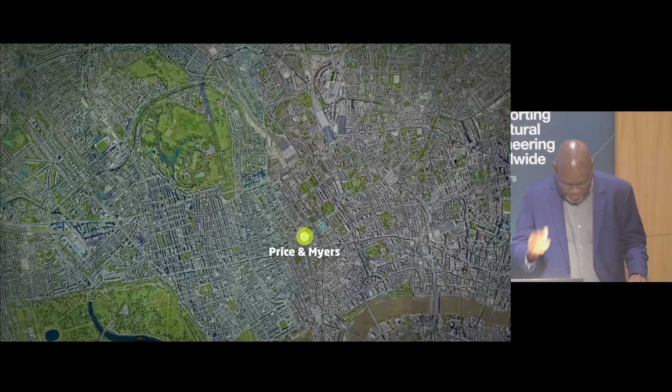Subsequently, I moved to London, working for Price & Myers for Sam Price, before joining the office of Anthony Hunt, a renowned gold medalist, whose mentorship was instrumental in my engineering development. Tony Hunt taught me the power of sketching in explaining the design process. Working with him was a privilege.

In 1995-96, along with Robin Adams and Hanif Kara, we established AKT.

As I mentioned earlier, I was deeply honored by the citation from the institution for this award, as I believe it recognized my approach to engineering and design.

Over the years, I've been involved in and I've led numerous remarkable projects. I feel an overwhelming sense of excitement and passion about being part of the process of constructing challenging and sustainable structures.

From the beginning of my engineering career, I have exceptionally been prolific in my involvement in structures, while nurturing and mentoring bright young engineers. I have surrounded myself with some of the brightest engineers, I believe, in the country.

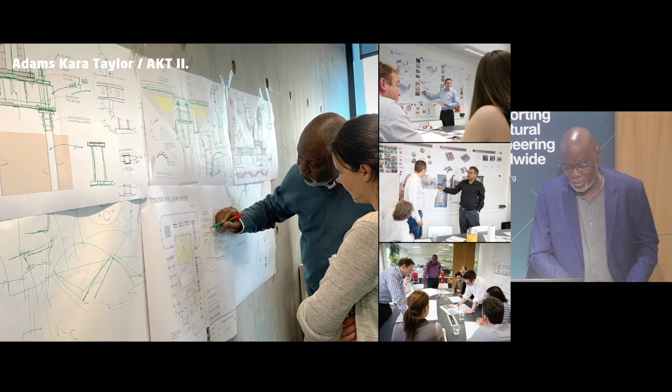The first project I'm going to present, in pseudo-chronological order, is the Royal Academy of Arts, Sackler Galleries at Piccadilly, when I was at Hunt's, working for Tony Hunt. It was an interesting project at the time with Foster and Partners, and it was to actually infill a gap between two historical buildings and provide a new gallery space to the roof.

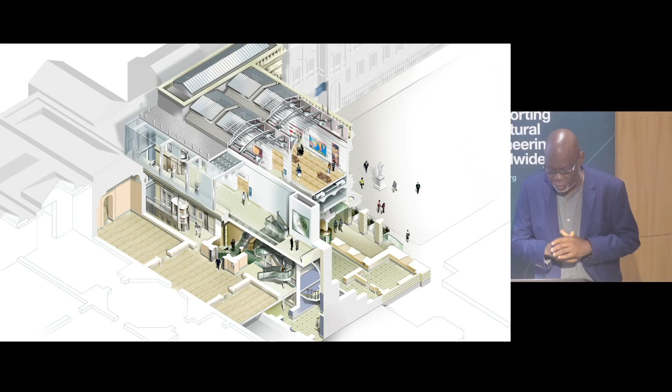The challenges to this project, and you've got to remember this was back in the late 80s, were two main issues. One was the fact that the norm of trying to create a half portal or a portal structure required eaves beams. But the architecture, Norman's architecture, was to try and bring as much light into the space from the rear of the building.

So his idea was to have glass that goes up and actually folds over the roof. So the challenge was to actually create a half portal without any eaves member. Back then there was a lot of negativity in doing it. But going back to the fundamentals of engineering, of what is the purpose of an eaves member, we were able to do it without having to provide any restraint.

Secondly, it was to introduce one of the first glass stairs in public space of this scale. Now, back then, there was hardly any glass stairs. So we had to design this glass stair without it being laminated, toughened, or heat soaked, by using pure, simple annealed glass. So you could see all the eyes raising.

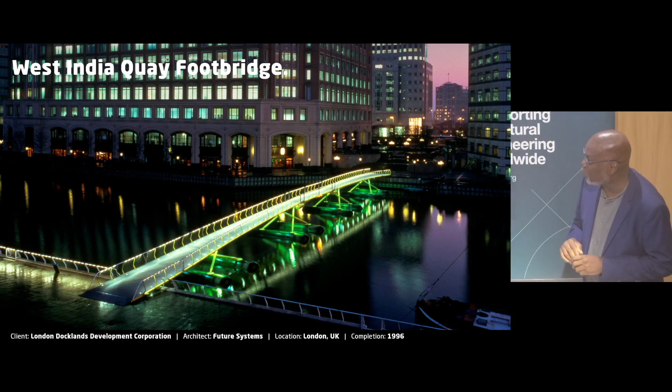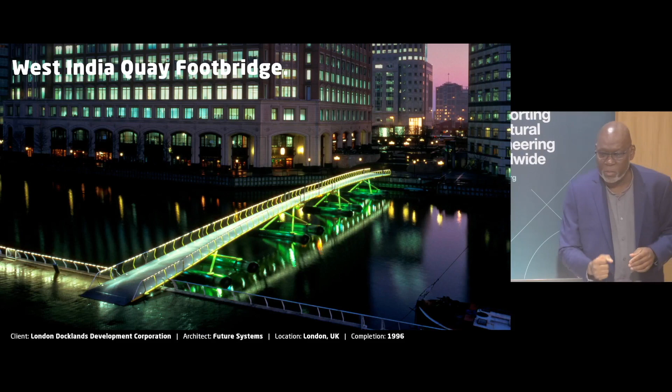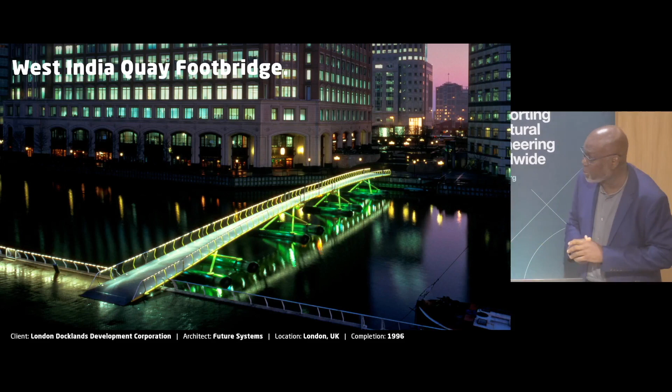Trying to go through the proof system back in 1994, 95 was proving very difficult. But we came up with the idea of having double pontoons, 10 meters long, 3 meters diameter, and doubling them with a cross member, and then using a cable to press them to the bed of the dock. By doing so, any tidal movement is eliminated. You only slightly feel the movement. And if any of you have been there, you'll see that's the way it works.

The next challenge was then, how do we deal with the opening mechanism? And we came up with this idea of actually counterweighting it through geometry to create a very elegant solution. And it was so well balanced that you can actually push the opening of the bridge with a finger. So we ended up with the tiniest hydraulic actuator, which was so small, we actually fitted it inside the tube, the spine tube that supports the bridge, to open and close the bridge.

And I must say, the guy who fabricated this was Bill Toston. And for me, he was one of the best fabricators on the planet. He was an artist with metal, and I'll talk a bit about him in the future.

I am trying to present projects that actually help to explain the way my mind thinks, the process I go through with engineering. This project, we actually had to go into the archives to try and find a picture of it. This is the Britannia oil rig, which is the last oil rig in the North Sea. And we were approached to do 4 staircases up to 8 levels to provide access up and down. And as you can see with oil rigs, it's all steelwork. And the issue here with so much steelwork: how do you maintain the protection on this steel in a very aggressive environment of the North Sea?

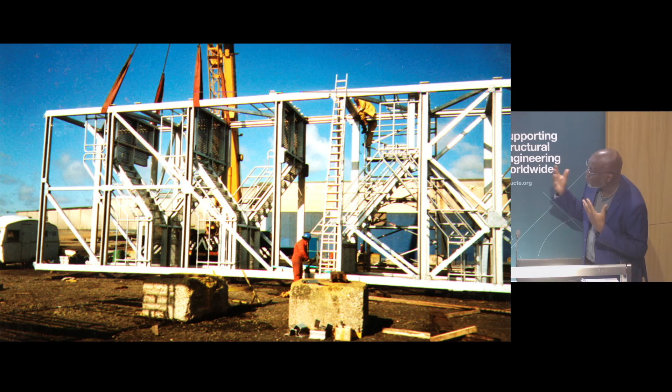And I said, this is who we are. We'd like to do some incredible aluminium structure. We'd really like you to give us some insight as to how we can weld this aluminium. And all I heard was clunk. That was the end of the conversation. But we did manage to do the project a lot lighter, actually quite stiff for what it's supposed to do.

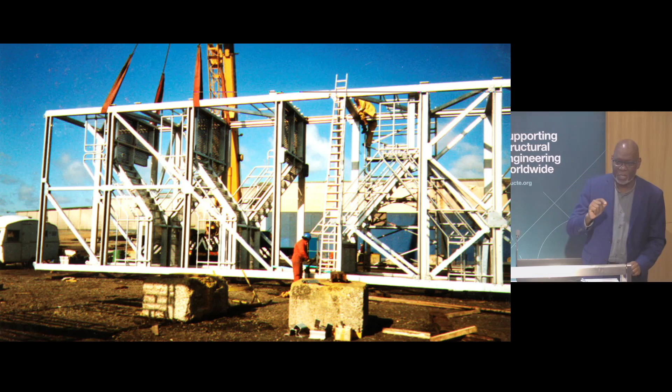Then the next challenge came on board, because if you're doing anything to do with the North Sea, you need to get approval by insurers, Lloyd's Register of Shipping. So they brought an army of engineers in to say, right, these are the procedures you've got to go through. We were a small practice at that time, and top of the procedure is that any structure you're doing in the North Sea needs to be analyzed using finite element analysis. Back then, it was 10 to 20,000 just for the license. And our most ambitious computer in the office then was the LC3 with 64K memory.

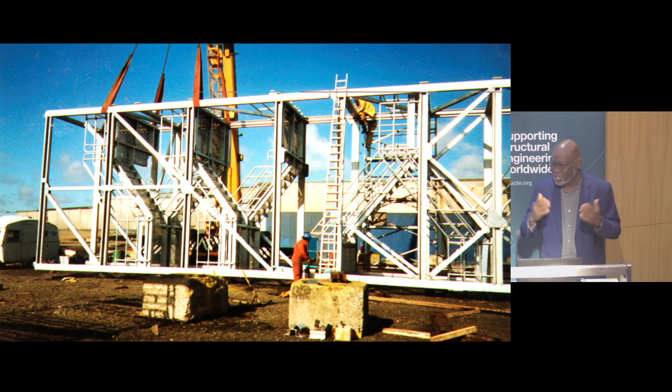And I can remember, right, where do we go from here? The solution wasn't the FE analysis. The solution was having a conversation with the engineers to discuss the fundamentals of analysis and structures. So, big meeting, sat there and I said, right, guys, there are three methods of analysis: stiffness analysis, which we had, finite difference, and then finite element. If you model your stiffness analysis carefully, the difference in result to FE analysis is about 5%.

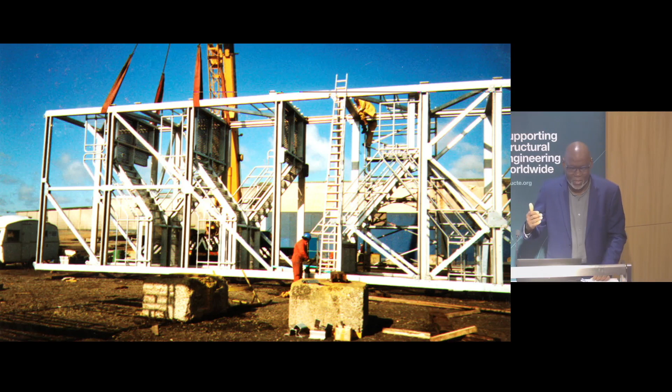And I went through all the theory with them, and they could not argue with the mathematics. And they then approved us to use a stiffness analysis to do this project. And I think it was the first. So we had to run it on a 64K Apple Mac that took 17 hours to run. But we got there.

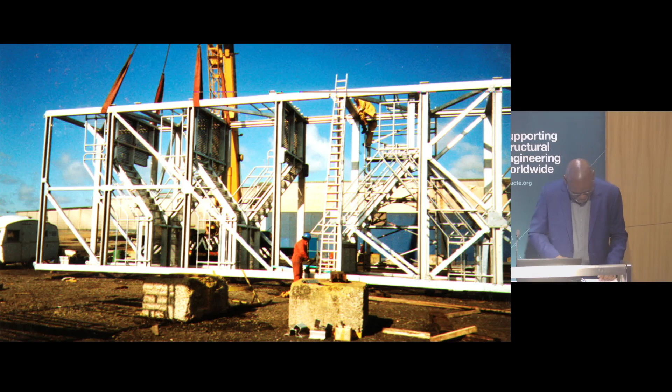Moving on, one of the other early projects we did was the rainforest in Hanover. And this building was the precursor to the Eden Project. Because when we left Anthony Hunt's office, the Eden Project was in the office, and it was a glass structure. Obviously, we did this competition with a very young architect then called Ray Hole, and this started back in 1997.

And there was this wonderful material called ETFE. It has a little bit of insulation because you're talking about pillows, and it actually allows UV rays through the material, which means it's actually good for plants, better than glass. But it wasn't codified back then. So we went through all the tests, German and everything. We then developed this scheme.

And one of the interesting issues we had was that the structure itself is not a pure dome. And because it's not a pure dome, we had two issues when we presented our engineering solution in Hanover, in Germany. This was just after the wall had just come down. One was the struggle to accept ETFE as a structural product. And secondly, the shape of the enclosure and the dome was outside the DIN standards. And that again was not acceptable.

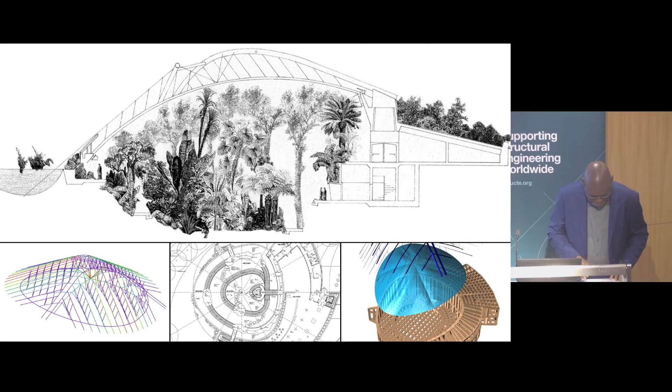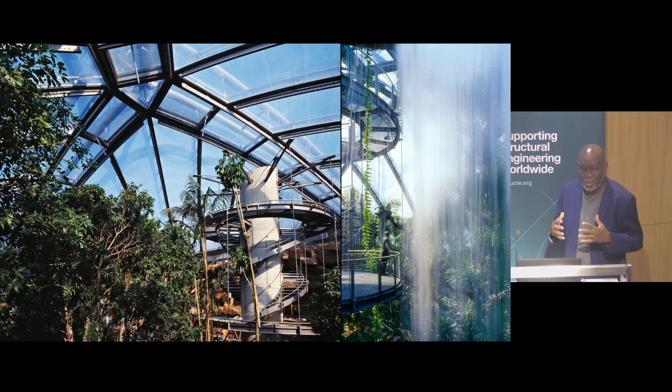And you can see, because it's got a little bit of insulation properties, they were able to create a super tropical environment in the space without having to lose so much heat. And we finished in 2000, and one of the South American countries used it as their exhibition space for the expo. Moving on, I'm not showing you fancy projects. I'm showing projects that have that essence of some of our thought process.

This is the LSE library in Aldwych, part of the LSE, and it was a project by Foster & Partners, and they were interviewing engineers, and we were not that big back then, and this was about 1998. We were put in as these young up-and-coming engineers, and we were there to only do the dome in the atrium for the glazing. And we were up against some of the usual suspects. And the director of estates for the LSE turned around and said, why are these guys put just to look at the dome? Just put them in with everybody else.

When we got the brief, this building used to be the headquarters for W.H. Smith. And the whole concrete building is fully carbonated. It is actually the building that was used to write the CIRIA guide for how to identify and deal with concrete cancer. Great. The scheme was to knock down the whole internal of the building and put in a new structure. And the first thing we said, we are not knocking it down. But they said it's carbonated. We said, so? If you actually understand the chemistry of concrete, carbonated concrete gains a tremendous amount of strength while corroding the reinforcement.

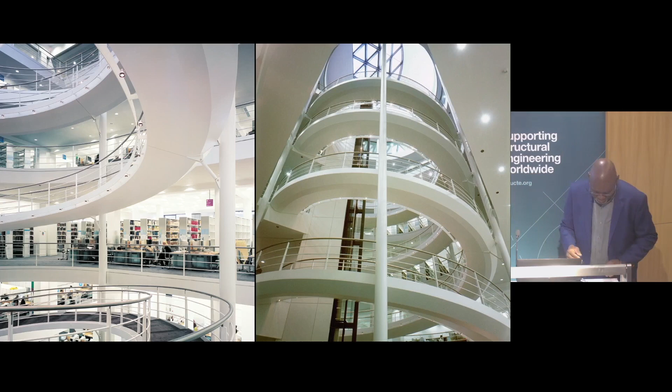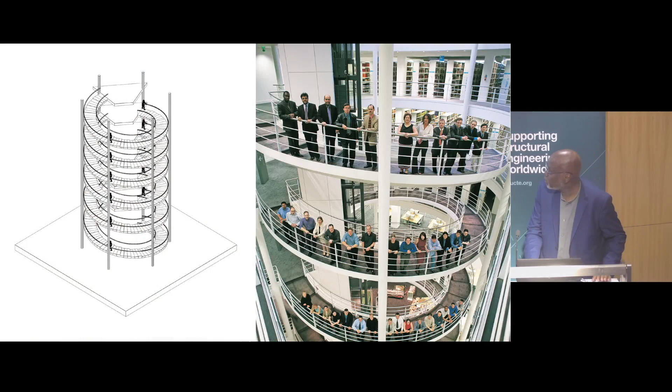The next project I'd like to show you is the East Beach Cafe. And this came about with Thomas Heatherwick, where he was working on it for a while, and he wanted to create this driftwood. And the client, who's probably here, decided to create something much more entertaining and iconic on Littlehampton Beach. So she bought this timber shed, got Thomas to come up with a design.

Thomas came up with a design with this shell with a lot of internal columns and everything, and it wasn't going very well. So the client then said, I like Albert's view on this. So we looked at this in the office, and you could see the passion of what the client was trying to do and what the architect was trying to do, and it was very aligned. That alignment means that what was being proposed needed a unique solution.

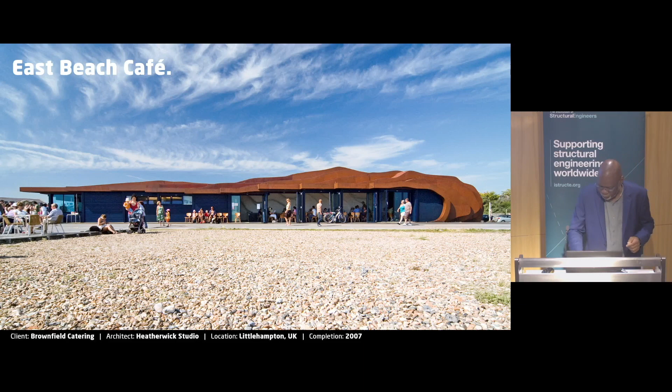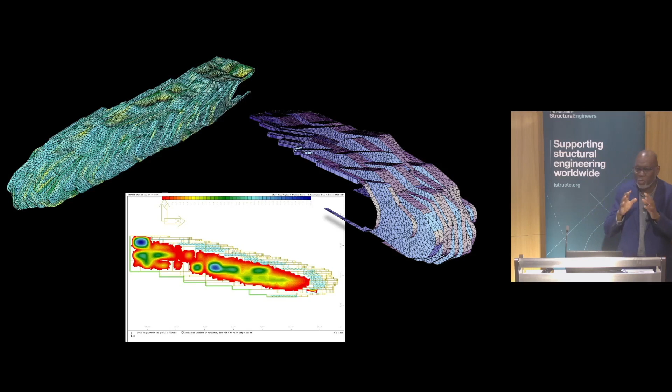And for us, it was first taking the architect's model and remodeling it. Not only did we remodel it to make sure all the curves and the dips were done in such a way that it will not capture any moisture, it will drain off. We took all the columns out and insisted we're going to try and get this to work as a shell without any internal supports. Then we also had to think about the environmental.

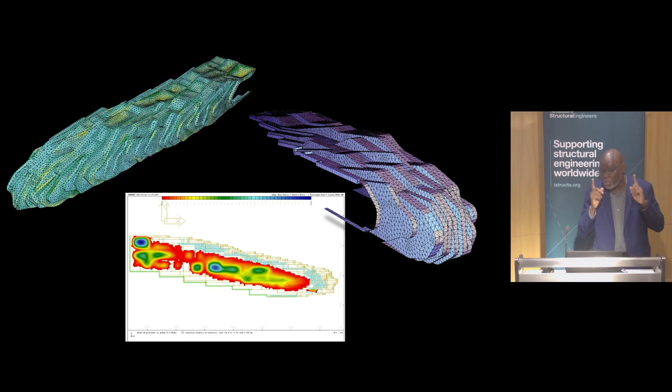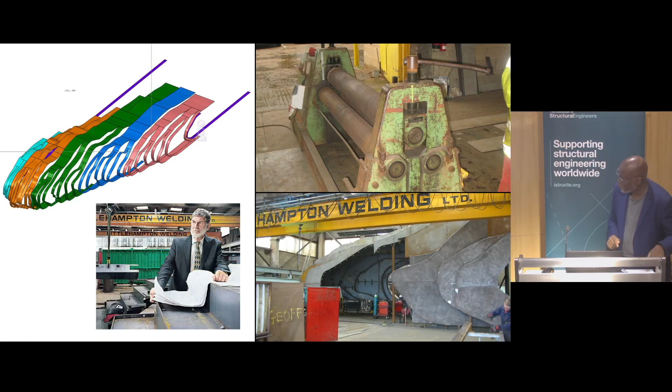So, the first person I contacted was Bill Tustin. As I said before, he passed away almost about 3 years ago. To me, he was an artist with metal. And he basically said, I have a 1950s roller somewhere in the shop, and if you can use that to do it, I'm on board. And you can only do 600 millimeters wide, and it's not more than, I can't remember, 6 millimeters thick.

So we redesigned everything to strips of 600 so that he can roll it, and the whole thing was rolled with that hand metal. And then the inside, we literally sprayed it with insulation, and painted it, that's it, to get the environmental in place. But we had a lot of fun getting it through.

The next project was again with Thomas. There was a competition for the expo in Shanghai. And I can remember we had a conversation, let's go for this. So we went for it, and we went through a lot of options. And we entered the competition, and Thomas was saying, I've got this idea. I'd like to do a box with about 20 or 30 spikes sticking out. And I said, 20 or 30? Why don't we try 100,000? He said, can we do that? I said, I wasn't sure whether we can, but I was quite prepared to give it a go.

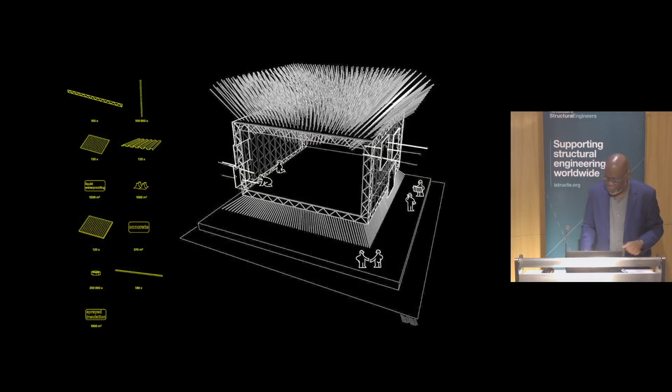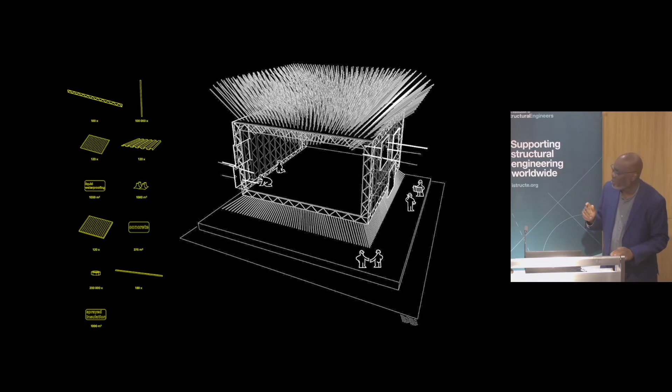And I remember this was the idea we presented: prefabricated timber box, drill. We never got to 100,000, by the way. There was just enough space for 100,000. We got to 60,000. To literally punch holes through this timber. And then Thomas came up with this amazing idea to actually use seeds from the seed bank. It was called the Seed Cathedral.

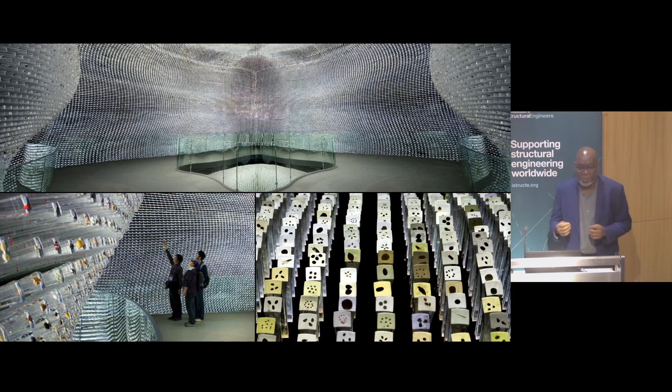And as you can see, the reverse of the shape externally formed an amazing space internally. And during the day, light penetrates into that space through every single acrylic rod. And in the night, the light goes in reverse.

Again, we had some challenges. And the challenges actually became a diplomatic problem, where the Chinese government at the time refused to sign off our design. And the British government was very clear that this piece of land for the expo is part of Great Britain, and we can do whatever we want. And then afterwards, we'll demolish it, and you can give it back to the Chinese. And the Chinese were saying acrylic and aluminium in our composition was not a structural material in China.

So Thomas and I had to take some very urgent flights to Shanghai to meet the ambassador's representative and a member of the Chinese government, and it became a loggerhead. This went on for a bit. Eventually, it was agreed that we get a professor from Tongji University to evaluate what we've done and approve it, which is exactly what we did. But even then, we had to compromise for political reasons.

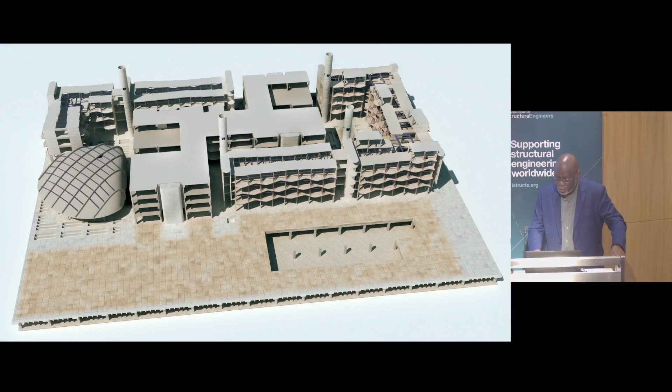The reason I've put this project in is for one reason and one reason only. From my experience, this project actually kicked off in real detail the whole conversation of zero carbon. Because when it was built, the client literally gave us a challenge. It was an incredible challenge to try and reduce the passive heat on the building. And we had 6 weeks.

We were called in and they said, we interviewed engineers from everywhere, what as engineers are you going to bring to the table to deal with sustainability and zero carbon? And we said, we only got one. And you got to remember, this is back in the early 90s. We said, in the Middle East back then, every time they were doing concrete of any scale, they had to use crushed ice in it to stop the cement hydration.

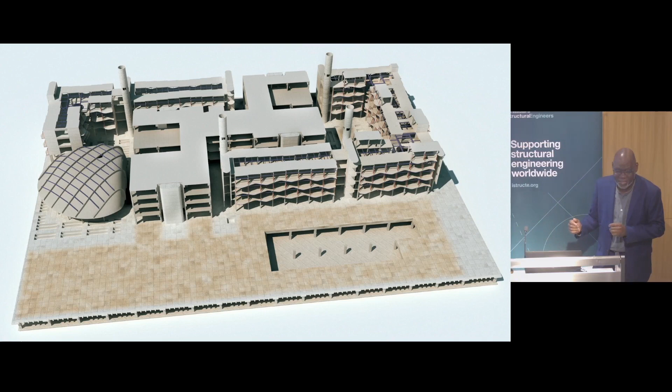We said, why don't we just take all the cement out and put a binder in and let the sun in the Middle East do what it does? And they said, is this possible? And we said, yes. So we took 80% of the cement out. They had to import the binders from India. And the client was so impressed and said, 6 weeks, we want foundations to start because we're going to bring the sheikh to see what we're doing. We're starting with a very sustainable approach.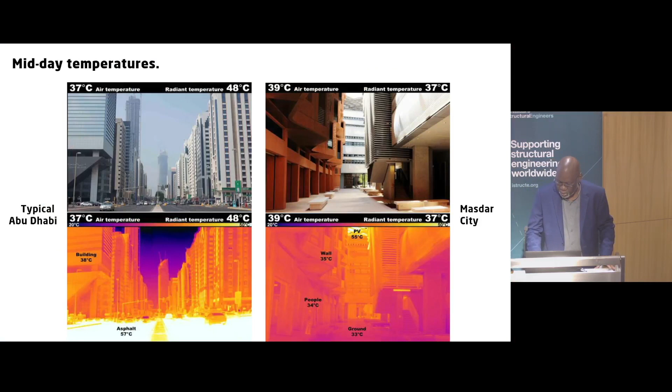And it got done. And some measurements were taken by Foster's afterwards, and you can see how the radiant temperature in Masdar is reduced compared to downtown Abu Dhabi on the hottest day. And this is relevant, very relevant, because we're using the thermal mass and the basement, or the podium we did, to cool.

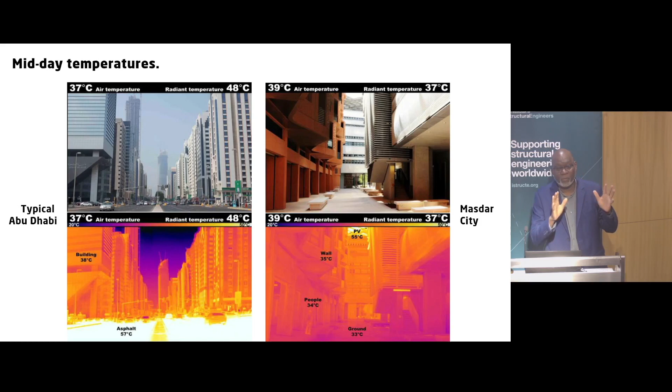And from my experience, this is one of the projects where you had some of the first electric cars self-driving using magnetics. So if you go down into the podium area, you just sit in the car, you type where you want to go, and it'll take you there. And I remember one of those cost, I think it was 1.3 million at the time. Anyway, they only did a handful and then they stopped. Technology moved on.

The next project I'm going to show is a fascinating one, this is the tallest building in Accra. And the reason I've put it on was, again, to try and explain how our office thinks. We got a call from the architect saying, "I've got this client. He's not crazy, but he wants to build the tallest tower in Accra, 25 floors plus." And he said, "Would you like to be involved?" I said, "Of course." So he came over, we had a meeting. He says, "I'd like you guys to get involved in the early days and move forward." I said, "Fine, that's fine."

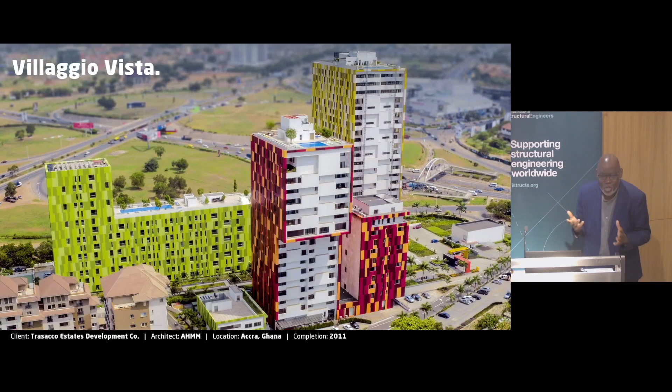And I said to him, "You want to do 25 stories plus here? Have you got any piling rigs in Accra?" "Yeah, we've got 3." "Right, I need a piling rig that can do 750 to a meter diameter as a minimum." He said, "I'm afraid the ones we've got can only do 450." I said, "Well, okay." Then he turned around to me and said, "Albert, do you think you can put me in the direction where I can buy a piling rig?" And I said to him, "No, you're not going to buy a piling rig for one project. Leave it with us." The solution was not to put a piling at all.

So the first thing we said to him is, your single basement is going to be a double basement. Put all your plant in there, great height, and we're going to create a caisson in concrete. And you're not going to pile this building, even though we're in a massive seismic zone, which is exactly what we did.

But I'm also very proud of this project because every material was done locally. Even the block work: we used a local block work of unknown strength, tested it, to form the external cladding to the building. And it's still there today, and it's still the tallest building.

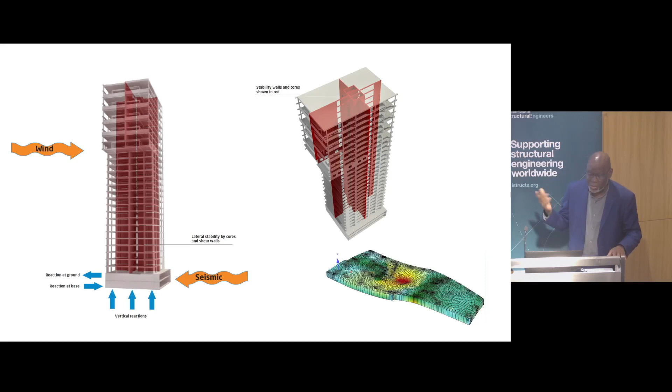And one of the most beautiful things was that they didn't have tables, so it's not a flat slab. We actually went back to the old beam and column process where we put all the beams on the perimeter. And every single column is one width, 200, to match the local block work. And then the length depends on where it is. And all the floors were done without any table form, because they didn't have any table form.

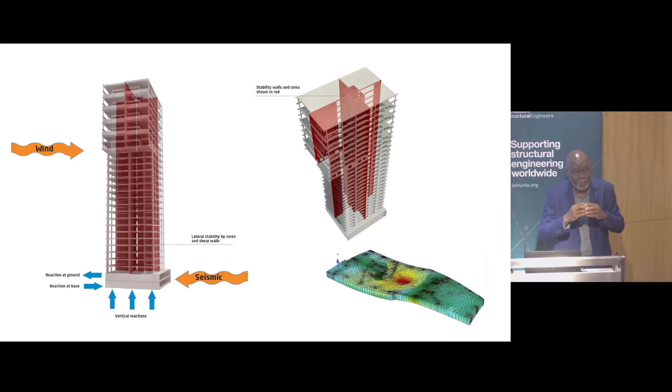So we went to the local concrete factory that produced 100 by 100 profiled lintels for doors, and we got them to extrude them 3 meters. And they literally laid them, no craneage, laid them next to each other, clear sellotape in between, put all the bars, run into the beams, topping concrete, and that's what made all the floors with a single line of support. And that's working with the local.

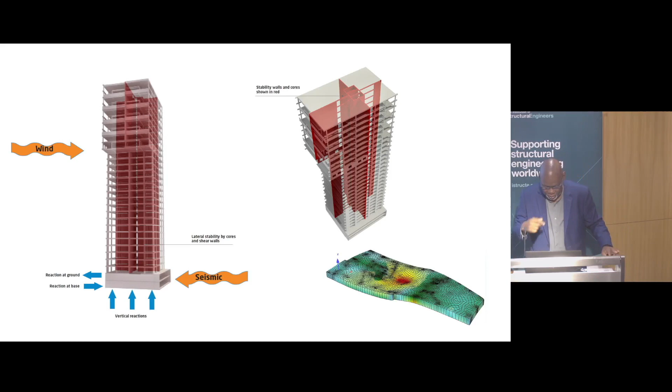This project with Zaha Hadid in Baku was very controversial at the time. She went to do this project, and I think there were a lot of people in the industry who were very critical of what she was doing back then, but her view was very clear. We're trying to do a museum and exhibition space, concert hall for the people, which is what was done.

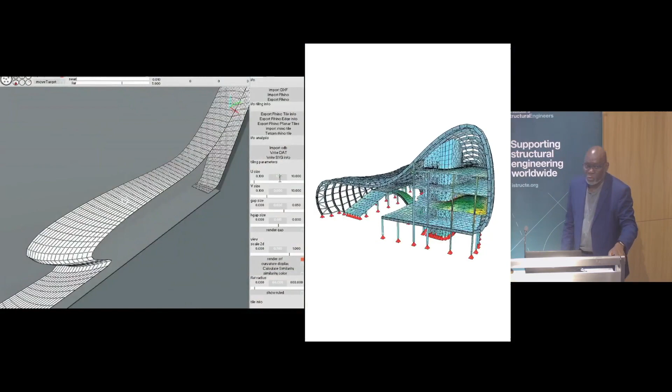Our involvement was very much in a high seismic zone. The local codes, and all the meetings were held in Turkey, in Istanbul, were basically to create a square, solid structure. We went for a very flexible structure. So we spent a considerable amount of time analyzing it and looking at the response of the structure. This is all exaggerated.

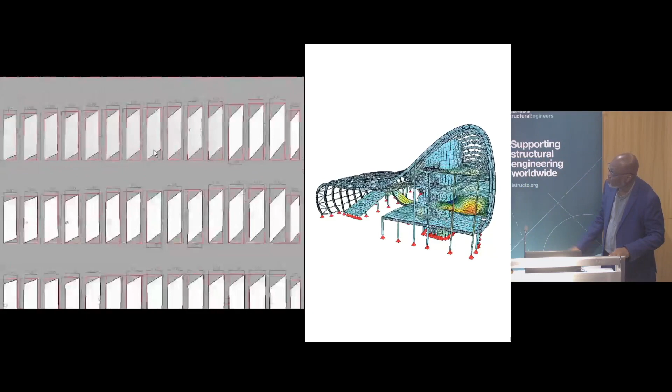But the other thing we got involved in very quickly was we actually wrote our own software to look at the cladding approach to the building, because the architect was very clear. She wanted the pavement to literally wrap the building in the same material. So we wrote this software and gave it to the architect and said, right, play with it. Increase it, squeeze it, create the parameters, and it nested the whole thing to give you the percentage of standard flat elements, curved elements, and specials.

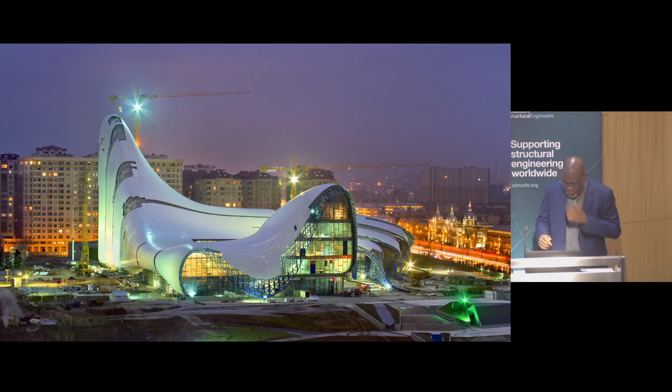And when we finished, we went through different scenarios, and you can look at the risk profile of all the specials. And this was plugged into the fabrication system for the cladding. And this is the end product. Also, politically, we could not even find any fabricator in the world who wanted to go to Baku to build it, apart from MERO. So a lot of redesign was done to make that happen.

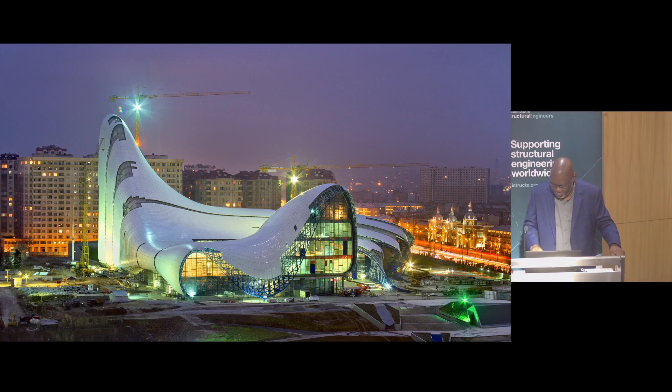Getting close to the end of the projects I'm presenting. The next one is one I'm very passionate about. This is the South Bank Tower in Southwark. And this project was a call from one of my best clients, he's sitting just there, George Kiriakou. He said, we're looking at this tower, it's pretty derelict. It hasn't been used for a long time. It was a hotel for the pigeons in South London.

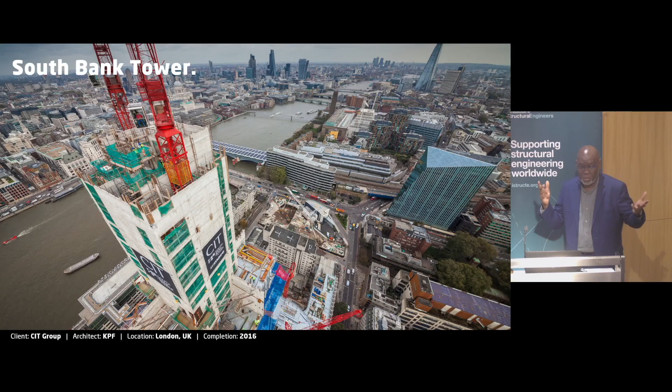And we then decided we can put between 11 and 13 floors on the existing building. But this was done without strengthening one single member of the original structure. And even up till today, people are asking me, how did you do that?

The way we did it was that we changed the load path of the structure. We also used a modern method of analysis for the wind. We actually wrote our own CFD analysis for wind before any other consultant I'm aware of in our industry, in-house. Then we analyzed the wind criteria from the 70s versus present day, and we have better data now around London.

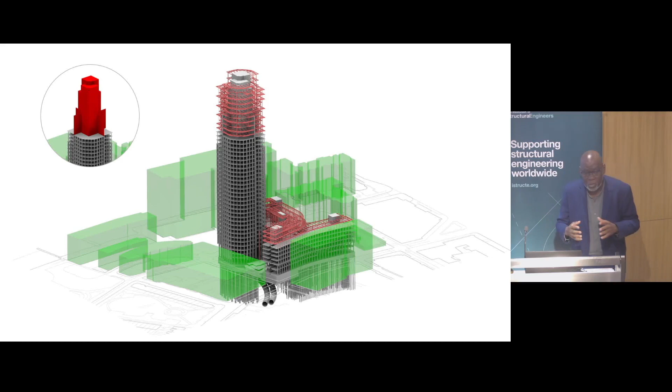We also took a lot of samples of the concrete and could see it gain a huge amount of strength, because all the external columns are precast, so they were done to very high quality. We had two tube lines running underneath the building, under piles, which were now under over-consolidated clay.

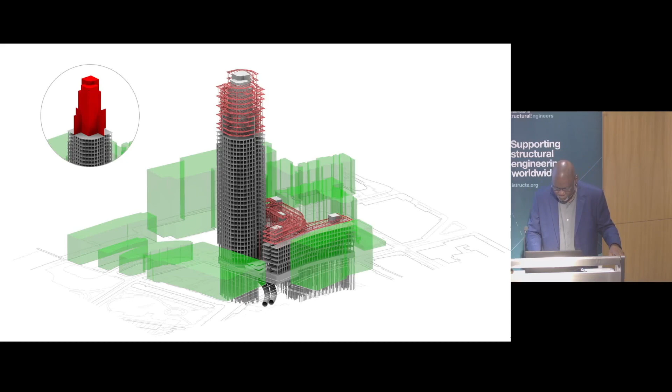By changing the load path, we actually took the original core and tore it apart. We didn't demolish it, we took the internal out and reconfigured it, and we ended up with a slightly stiffer core. By changing that load path, we were able to take that building and make it into a much more elegant tower. So rather than demolishing it, we said no.

I was one of the planning review panel in Southwark at the time, so I had to excuse myself. One of the objectors was Westminster across the river, because they thought it was a joke, an April Fool's joke. So I had to go present and say, it's not a joke, it's real. But as I say, you cannot do these projects without having very good clients who really support the approach.

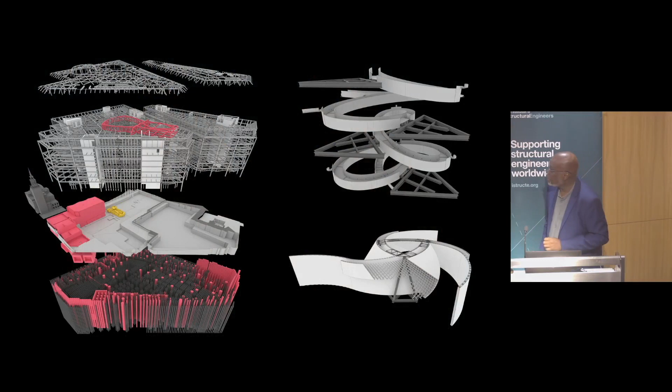I'm going to run through this very quickly. Everybody knows about this project - the whole block with Bloomberg headquarters, again with Foster Partners, and again we ran into the usual challenges.

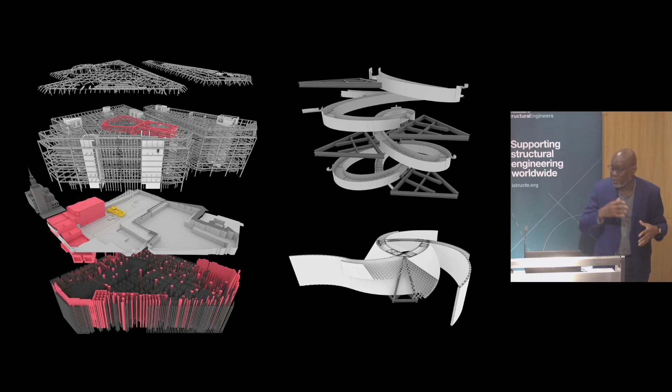One of the challenges of this project was the fact that on the site we had 3,000 existing piles from the existing building which was demolished. There was a guide produced on how you test and reuse existing piles - you have to take a sample of them and test them. So all the gray bits in the piling diagram are the existing piles, and the pink bits are the new ones.

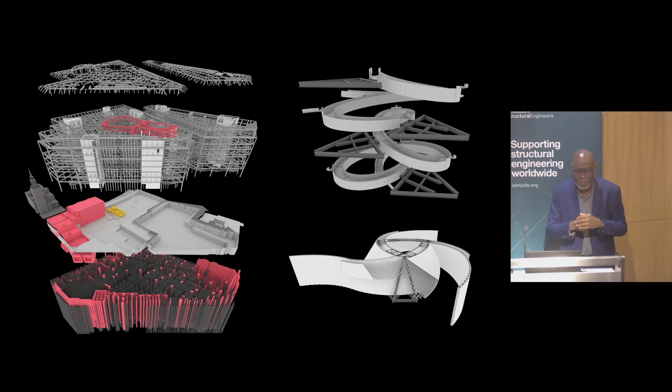I remember there was a whole conversation about the CIRIA guide to do this, and it was going to cost thousands to test a percentage of these piles. We had some very heated arguments, and I just said, it's not going to happen - it's going to cost the client hundreds of thousands to do that process. So we said we're not going to go through that. What we're going to do is detach.

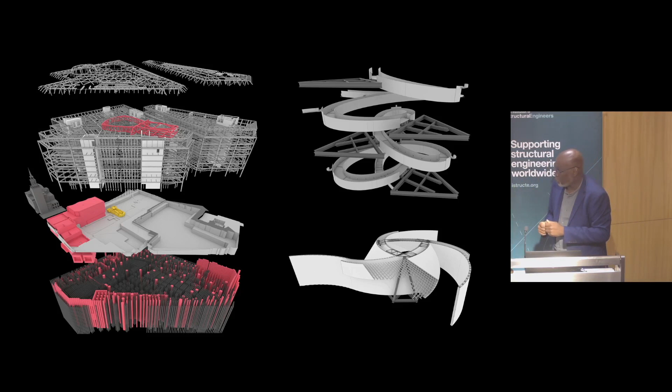Again, this is all driven by insurance companies. And I kept thinking to myself, hang on, we are the engineers - we should be telling the insurance people what the risks are and what the positives are. We cannot be designing to insurance companies. So we said our solution is to detach all the piles, because you're not allowed to put a new building on old foundations, and then put a raft on it.

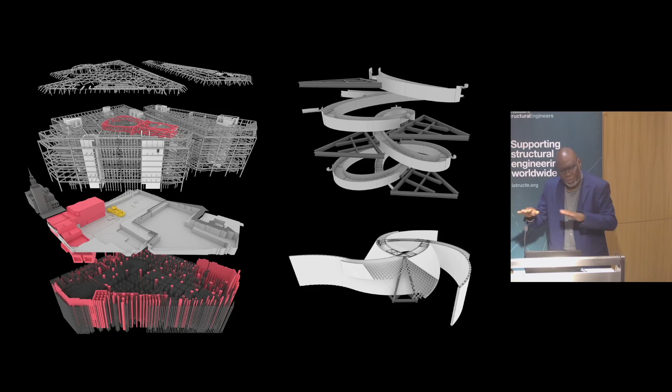Philosophically, our approach is the existing piles are part of the ground, the substrata, and they're there to strengthen the ground. I'm going to put a raft. By detaching it and putting a meter of crushed material, the stresses go into the soil but then go back to the same piles without having to test them. By doing a series of very intricate analyses, we were able to prove our point. But that wasn't enough.

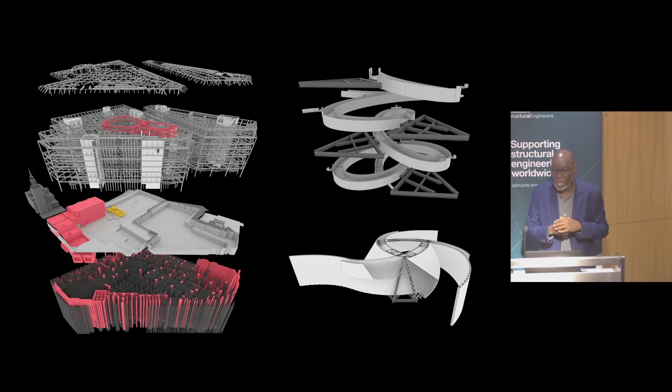All the big geotechnical departments in London were brought into this. It became such a big issue that the client had to get Irwin Cantor from Cantor Seinuk, who did most of the towers in New York, out of retirement to review our approach versus the standard approach. You can guess - we delivered the project.

I'm almost at the end of this section of my address. The Vessel, to me, is a very controversial project. The client wanted a sculpture where people could gather on the west side of New York, on a podium that covers the rail tracks, with very huge frequency issues. They wanted a sculpture, a symbol for the center of the development.

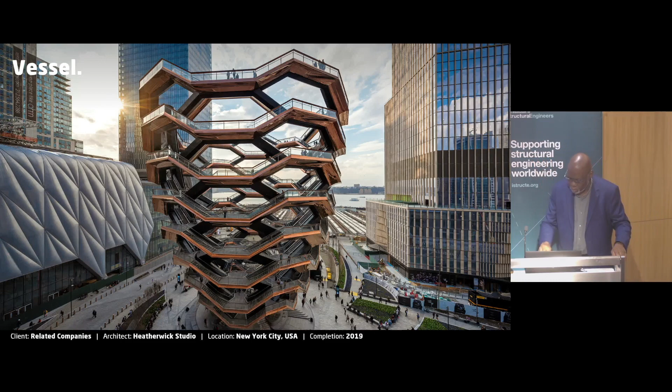This was for Related. So we flew to New York, they came to London, and Thomas decided he wanted something more - rather than a sculpture that people just stand and take photos of, something that can be used. So he came up with this idea. But the issue was the criteria was enormous, because they were going to use it for everything, from concerts to people exercising in the morning. The ambition for the project was a very good ambition.

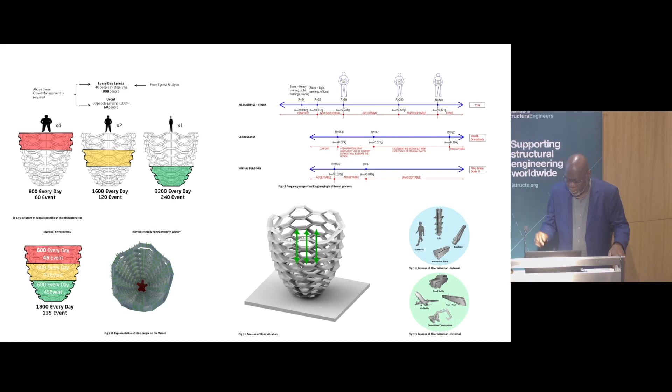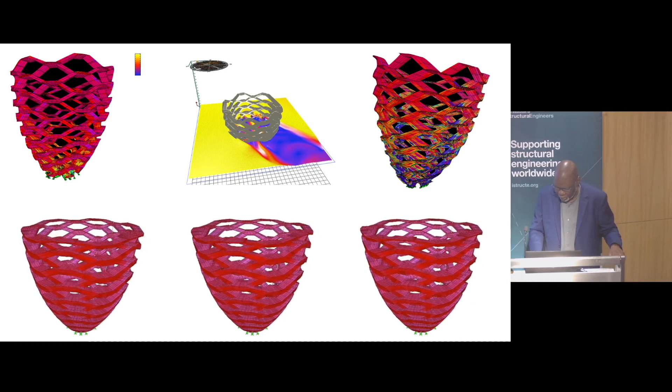Sadly, it hasn't gone that well. But from a structural point of view, it's all to do with dynamics, and a huge amount of analysis was done around that. For us to make this work, every aspect of the design, of the architectural form, is a structural form - there's no cladding, no secondary cladding to this. We had to use every single element as part of the structure, and we had to run a huge amount of analysis to make it work. Then we had to get Cimolai from Italy to fabricate it, because the Americans were struggling to fabricate it.

So for us, we had to put some dampers in so it can hold concerts and run up and down, and we even had a curved lift internally so you can bring people to certain parts of the structure.

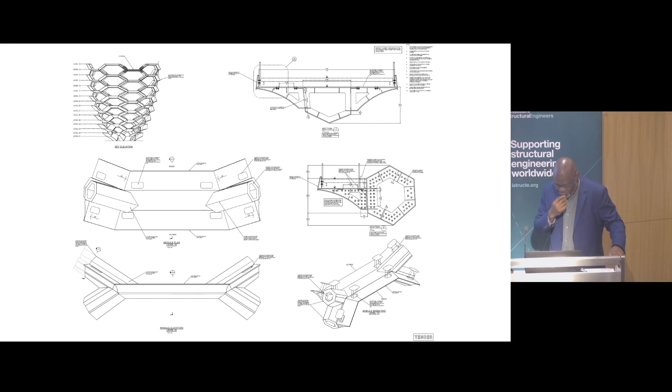So the last few slides I'm going to go through: the Google headquarters in San Francisco, in North Bay Shore. We were sort of put on a plane over there to talk about both a master plan and creating some biodomes. The client wanted enclosures with hospital quality air for his staff, so a series of biodomes was designed. This was a collaboration between Bjarke Ingels and Thomas Heatherwick.

So we spent a lot of time there. We looked at glass and ETFE. It was clear we're in a very high seismic location in North Bayshore. But the issue of being in a high seismic zone means you also have to look at what's below ground, and the substrata on the site is silt and sand, highly waterlogged. So in a seismic situation, the whole thing just liquefies.

So our starting point was that we have to have a foundation system that floats, because trying to pile it would have meant you'd have had to go to Australia with your pile, and that wasn't physically possible. So the solution that was developed was to use a cable net, a cable structure.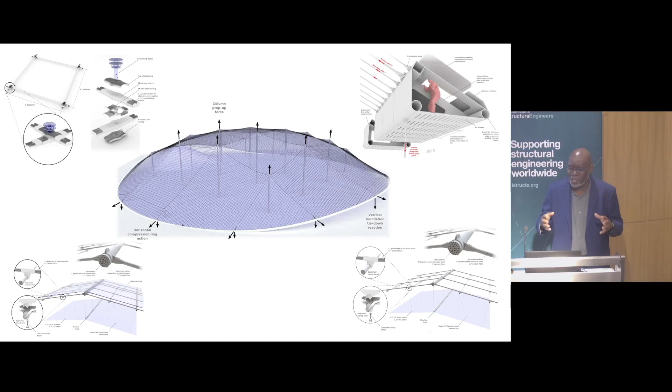Now I have a real problem with cable structures. They're very light, they look beautiful, but all they do is transfer the forces and the stiffness elsewhere. You end up with tremendous tension forces to create that form and shape. That meant the amount of concrete you'd have had to put in the foundation system to hold this cable net with a glazed enclosure - we could have built an airport with it. So it was definitely not a solution.

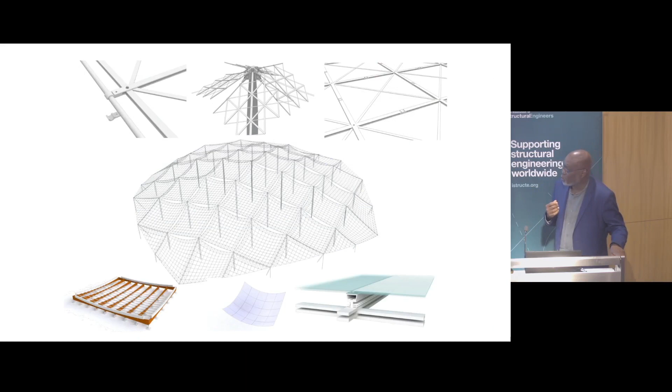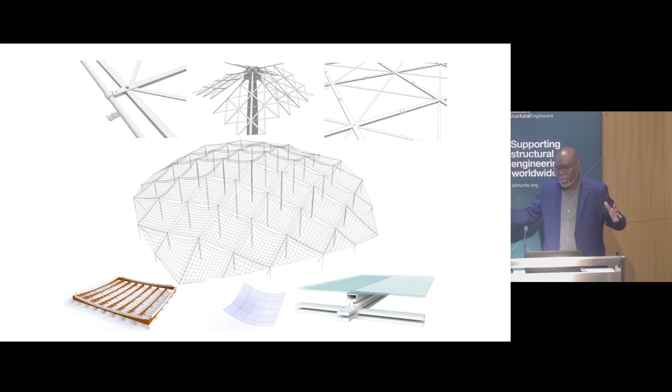So what we came up with, we call a grid net. The grid net works by using flats, overlapping flats, to form the same shape. This puts stiffness back into the roof structure while maintaining the form and reducing the amount of tension forces around the perimeter, which means you can do a nice floating raft foundation - which is exactly what we presented.

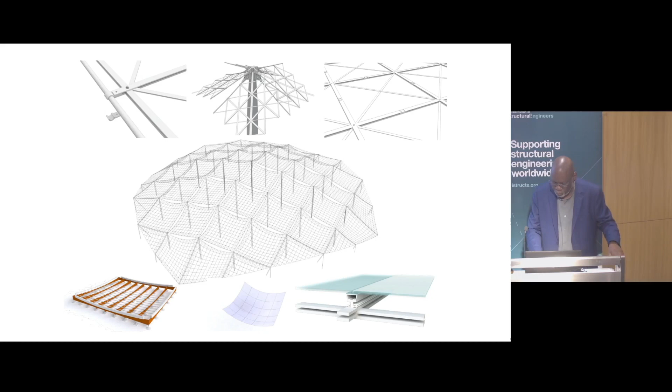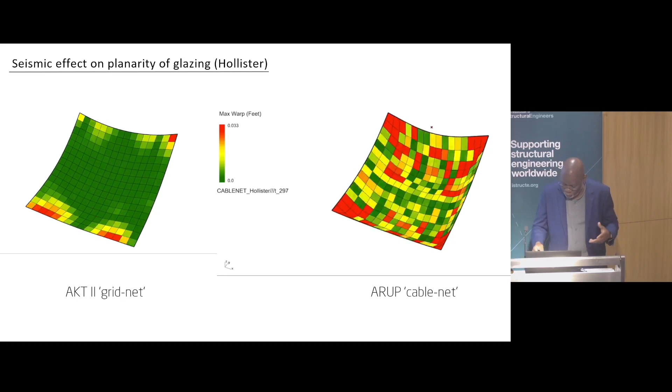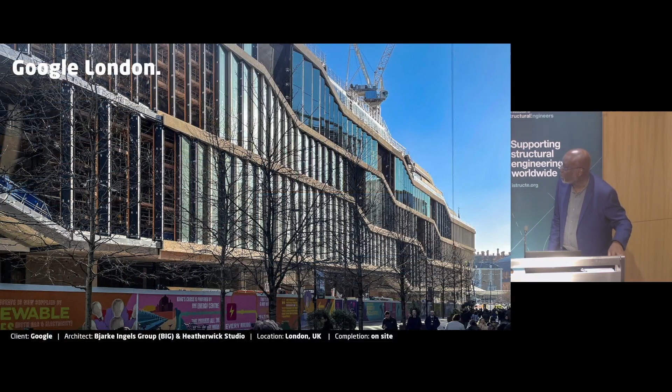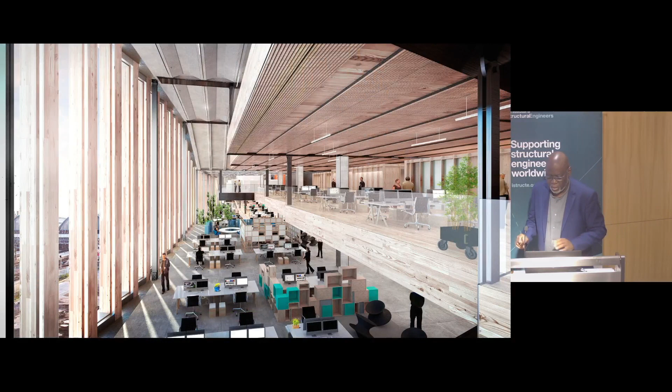And this project then led to Google in London. We've done some amazing stuff in this building, but I can't tell you - there's so many NDAs on this. But what I can say is that it's probably got one of the largest timber CLT floors in London, and every fourth floor is a concrete floor, which allows us to deal with the fire situation in a compartment. All the external is done in timber mullions, but I'm sure there'll be lots of conversation about this building when it's opened - it's still on site.

The external of the building has no external columns - the whole thing is floating. It's 300 meters long, 22 meters wide on one side to about 65 on the other, and it's a public park right on the top 10 to 12 floors.

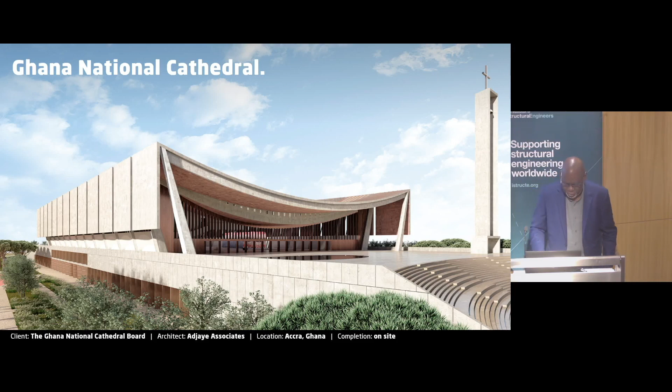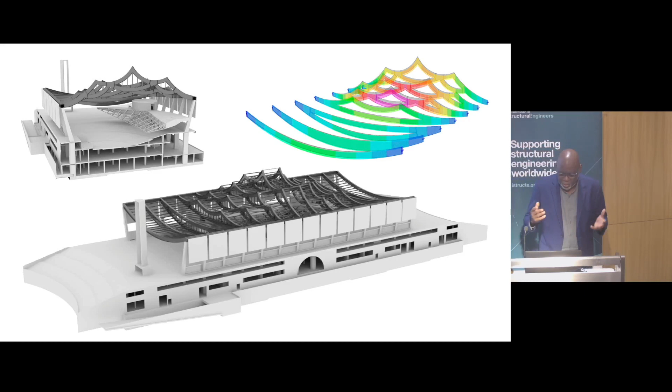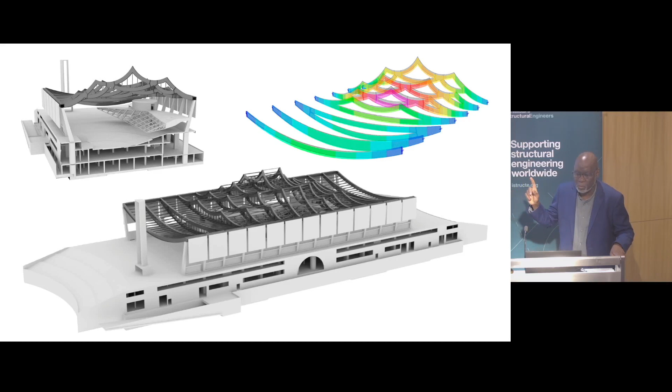And the challenges we had here - the design was to go from a sort of catenary form into a castellated form, which represents some of the kente covering from old tradition. The major brief for this was we had to use local materials all the way through. So for me, this project aimed to achieve a seemingly impossible reverse engineering of a complex state-of-the-art design in a developing environment.

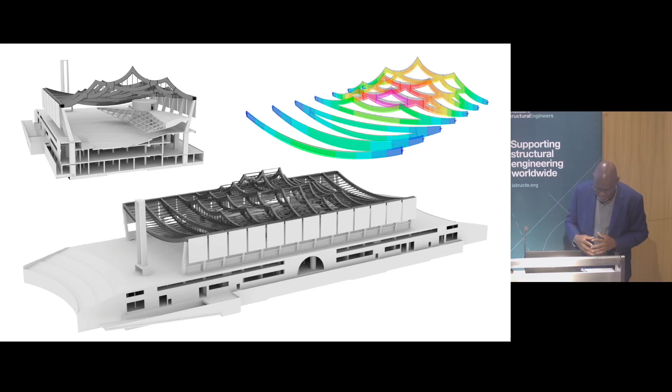Part of the brief was also a goal to share knowledge with the engineers and empower the local industry, and provide them with confidence that, yeah, we can do a project of this kind. And my team in London have been amazing.

Finally, I thought I should show the Hylo building. The Hylo for us was the next generation after the South Bank Tower. The client who called me to come look at this is also sitting here. Basically, it's a 17-story exchange building.

We went to look at it, and he said, oh, some engineers have said they could put this much on it. Can you do better? A challenge. And a challenge it was.

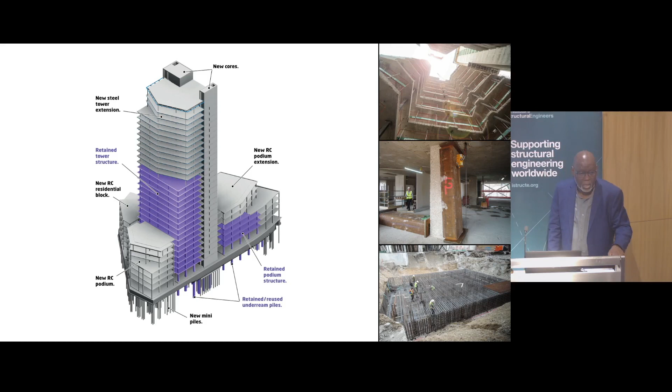So the blue purple bit is the original building. What we had to do was strip the building down. We had two major cores internally. We demolished one of the cores, expanded the girth of the building, and added 13 floors to the existing 17. We did this without touching the foundations, though we augmented them with extra parts because we made the building wider and used a lightweight structure. The columns at the top of the existing building weren't strong enough, so we just put steel casings on them. The client, as part of the interiors, just left them like that.

This brings me to the end of this section of my address. I hope I've been able to share with you the thought process of the way I think as an engineer, and my team, AKT, as a practice—and a fair number of them are here today—the way we think as an organization and the way we look at structure. We don't just look at it to solve the problem. On some of our projects, we actually challenge the brief and challenge the client. But for us, the project is key. We will protect a project at any cost.

Now, going back to my written form, these are a few of the projects I've had the privilege of leading with my team. As the lead design partner at AKT and overseer of the majority of our international projects, I'd like to take this opportunity to address some issues that, in my opinion, warrant consideration within the engineering community. I take great pride in my role with AKT.